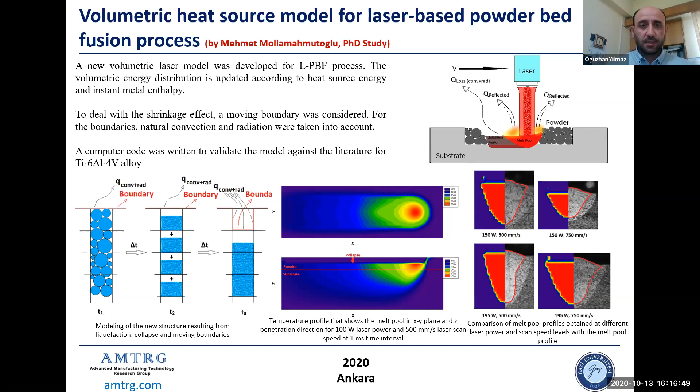And so we also validate with the literature, and now we are doing some experiments in order to validate. At the moment we achieve a very high percentage, but this is still under research. In the near future we are going to validate our model, and hopefully develop a small software in order to predict the melt pool and design the parameters for the SLM process, laser powder bed fusion process.

Another study, very close to the previous one, is being done by Ayşe Kübra. She's also working on melt pool, but in this case she's focusing on how we predict the phase transformation during the SLM process, based on how much heat we apply to the powder and what the heating and cooling thermal cycles and interlayer time will be, and what could be the martensite decomposition.

So again, we are working on developing a model using software like COMSOL, and then we predict the thermal gradients and cooling rates, and what is going to happen after the process, especially for titanium 6-4—can we reach martensite transformation, and what could be the effect of layer thickness on this martensite decomposition considering the heating and cooling rates. This is still under research, so she's continuing her PhD, and these are the first results of her study.

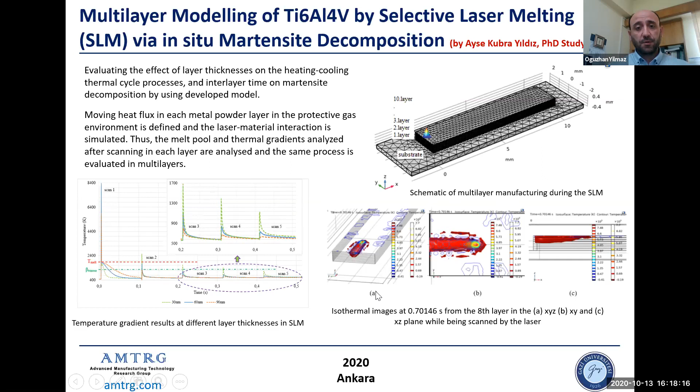And we do some research mainly on the post-processing of additively manufactured parts, because we know the parts have very poor surfaces. The surface roughness is very bad, so we need to remove or improve it. So we have an experimental setup, a laser beam machine, and we do some laser polishing processes.

Basically, laser polishing is a known process, but we apply it especially for EBM surfaces made of titanium 6-4 and Inconel. This is a research project supervised by me and Yusuf Kaynak at Marmara University.

We did many different experiments to find out the best and optimum parameters for laser polishing of the surfaces, how we could improve the surface, and what the effects of the laser on the surface are, because we observed some cracks, oxidation, elevated edges, etc. So we tried to improve the laser polishing process to make it applicable for improving the surfaces of additively manufactured parts, mainly the EBM parts.

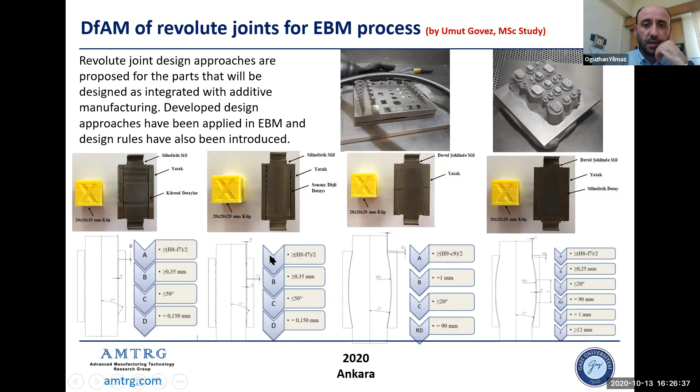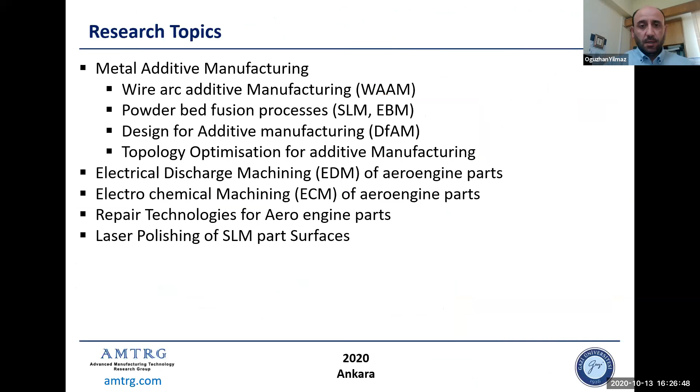I would like to know how you deal with residual stress, especially in the wire arc additive manufacturing process. Yeah, residual stress is very critical in wire arc additive manufacturing, and we're still working on it. One of my PhD students has this topic. Yes, we did some measurements, but I didn't put them in here, sorry about it. Firstly, we saw that there is a very huge amount of distortion. Residual stresses are there, and we did some measurements, but at the end of the day, you cannot escape from residual stresses.

So we are planning to firstly do some post-processing, like putting them in a furnace, so a heat treatment process. There are some ways like vibrational relieving of residual stresses, but at the moment we are not focusing on residual stresses. We are mainly focusing on producing such parts without any faults and with satisfying mechanical properties.

I would like to know, because I had a collaboration with Cranfield University, you most probably know them. Yeah. I'm wondering, because in titanium 6-4 especially, we have really anisotropic mechanical behavior. Did you optimize the process? Well, we didn't work on titanium 6-4 so far. Isn't it for titanium 6-4? No, this is high strength low alloy steels.

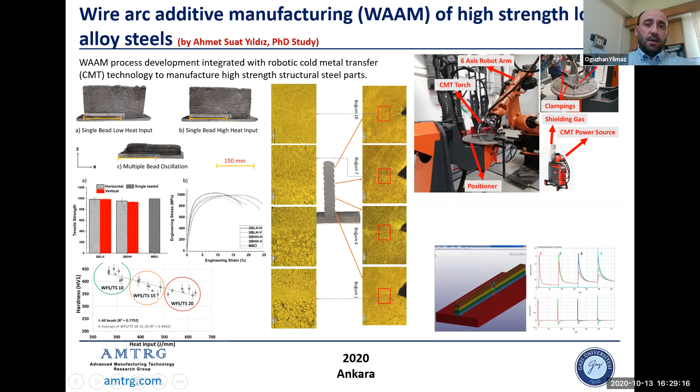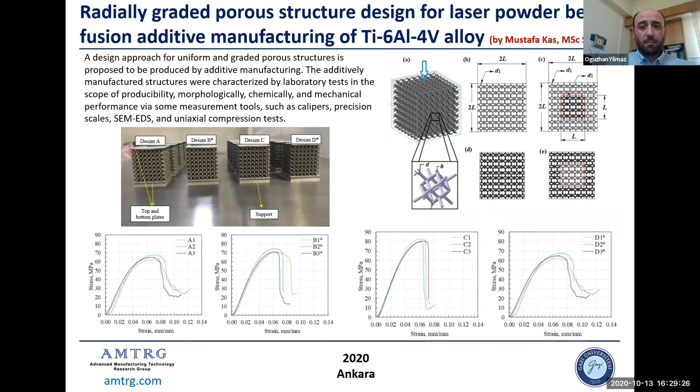Thank you. Well, these are some of my, not all of them, some of my PhD and MSc studies, mostly completed ones. And also we have some progress on some ongoing and completed industrial and academic research projects, and I would like to mention them.

First, one of them is an SLM machine, a powder bed fusion process machine, which was designed and developed by Ermaksan. It's a company in Turkey located in Bursa. This is a TÜBİTAK project, and I was one of the members of this research team. It is an honor for me to be a part of this team and to design and develop this machine. This machine is now a working machine, and they are selling it as well. So it is one of the projects I'm very honored to be part of as a member.

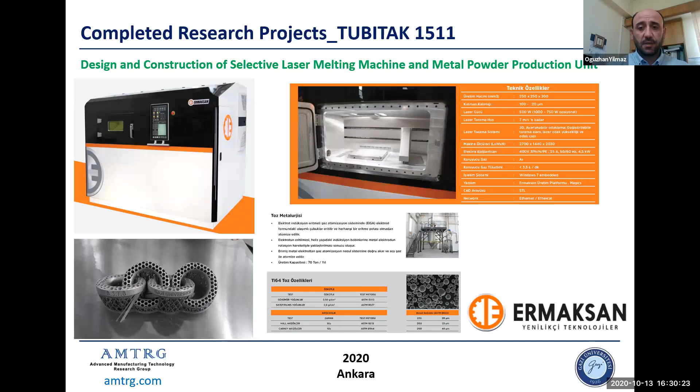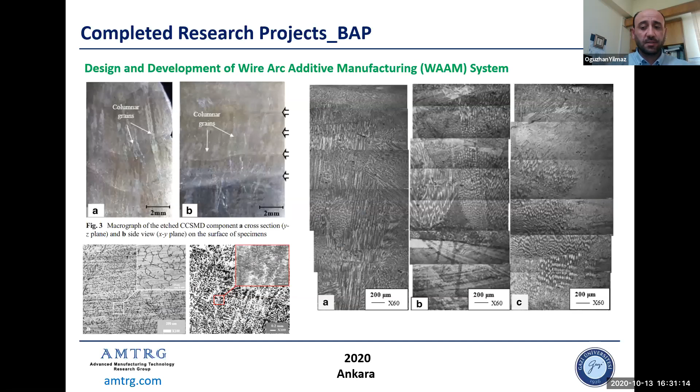Also, about 10 years ago, we started the WAAM process by constructing a primitive machine. This is a TIG type of torch, as you can see, and we externally fed the wire, and we worked on some stainless steel parts. I worked with my PhD student. He graduated, Adnan. He's in Iraq now. We did many different works and published papers for this work. We were able to develop very basic shapes and also machine them, and we tested them, and we did many analyses, like microstructure analysis, and we were very successful. So I am very proud of showing you such a machine.

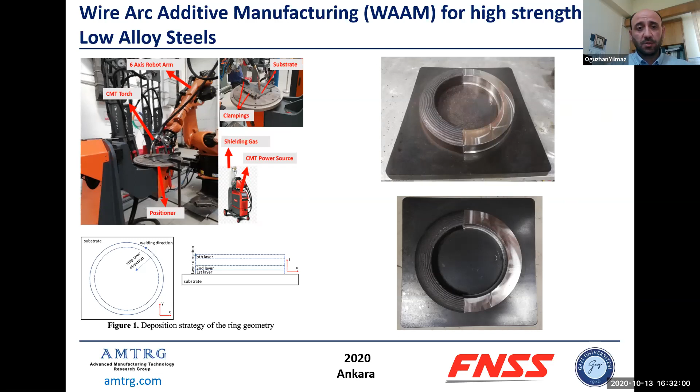And one of my projects has just started with Intecro company, which is a robotic company in Turkey, in Ankara. In this project, we are aiming to develop a robotic WAAM system, which has online and offline control systems, and it's going to be a highly technological manufacturing cell, a WAAM system. All the conceptual design has finished, and Enes Gebel is probably one of the participants. He's also working as a researcher in this project, one of my PhD students.

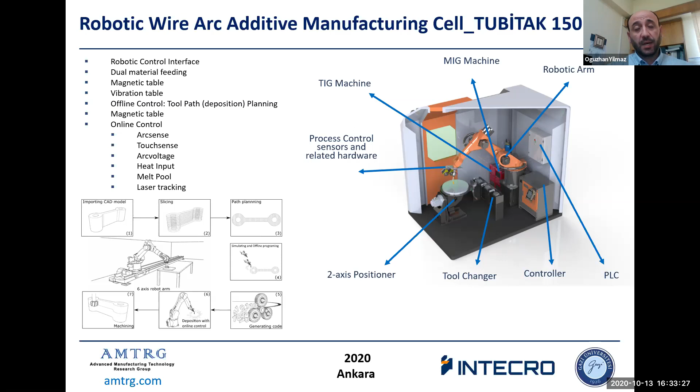In this manufacturing cell, the WAAM cell, we are aiming for a whole system, starting from the CAD model to near net shape manufacturing. It also has arc sensing, touch sensing, arc voltage, heat input, and melt pool monitoring systems as well. As I said, it's going to be a highly technological machine. It is going to be developed and manufactured maybe in 2 years, but we are at the beginning of the project.

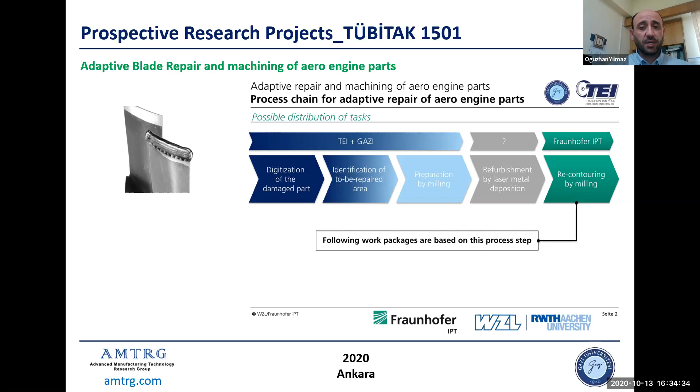Also, we have a prospective research project with Fraunhofer in Germany for repair. Repair is a related technology for additive manufacturing, because when I was working at Nottingham University, my PhD study was related to repair. We were using DED systems with powder and wire, and we were calling the repair technology additive and subtractive manufacturing systems. So I'm still continuing this research, and I have contact with Fraunhofer, and we submitted a couple of research projects to European funds. We were refused, unfortunately, but we keep trying. And the Turkish aerospace industry, TEİ in Eskişehir, is also one of the collaborators in these projects. So we keep trying to get the funds for this research project.

We also have another project with Fraunhofer and TEI. It's a prospective research project. It is under evaluation at TÜBİTAK. This is about how we remove the supports from metallic components. Normally, these are the dirty secrets of additive manufacturing, because removing such supports is very labor intensive, it sometimes needs very special tools, and it is very, very difficult to remove them.

We proposed a research project to develop a machining strategy in order to remove those supports from the metallic components. Okay, and this is the outline of this project. We submitted this project to TÜBİTAK, but we haven't got the result yet, and hopefully it's going to be funded, and then hopefully we work with TEI and the Fraunhofer Institute.

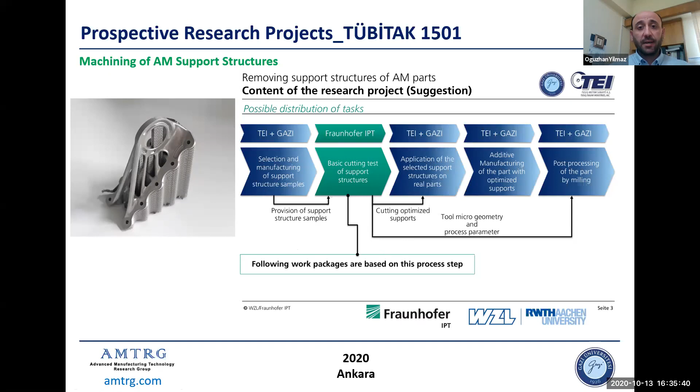And I have another research project with Turkish Aerospace Industry. In these research projects, we try to redesign and manufacture critical components for helicopters. Firstly, of course, in these projects we have the design and manufacture stages. In the design stage, we are going to use some kind of topological approach in order to redesign the current parts. And also, we are going to manufacture them and test them.

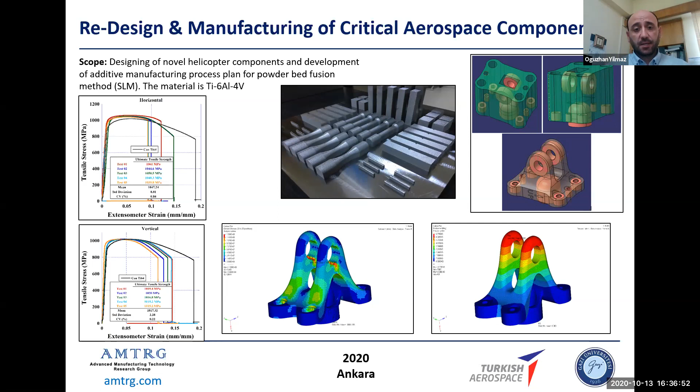This is the first year of this project, and firstly, in order to qualify the machine, qualify the process and qualify the materials, we produced some coupons, as you can see, and then we tested them, and we have very good results, which satisfy all the mechanical properties that we need. As I said, this is a 2-year research project. We are in the first year.

So we are waiting for the Turkish Space Technology Research Institute to put them in the satellite and launch it to space. So if you allow me, I would like to show my videos of how we design and how we test it.